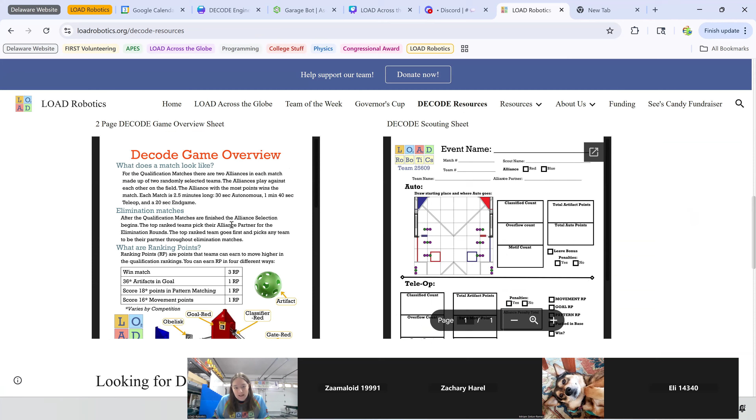Next is our Decode resources, all found at loadrobotics.org. We have our Decode game manual quiz, which I recommend for all your drivers and honestly everyone on your team to take, it's really helpful. Also our Decode Booklet for playing with your team, that's a lot of fun, just making sure everyone knows the game rules. And then we have our Decode game overview, for giving to parents and spectators, a brief overview of the game rules, and also the Decode scouting sheet. You can find all that on our website, loadrobotics.org.

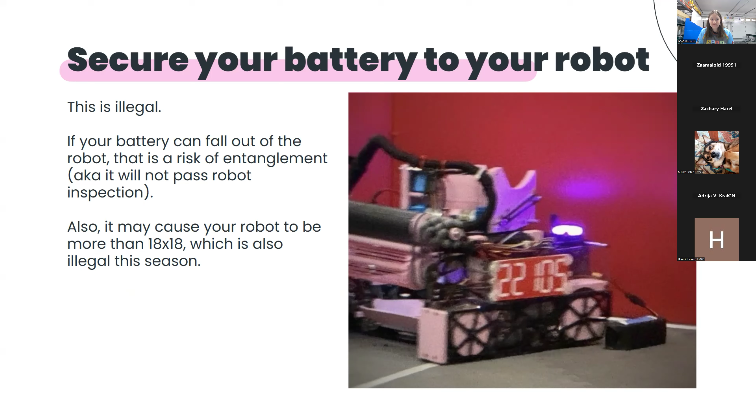So please don't put your power switch in an exposed location. But on that note, make sure it's accessible. In this example, I think they ultimately moved it to be on top of the U channel of their drivetrain, perfectly accessible, but another robot is not going to accidentally hit it.

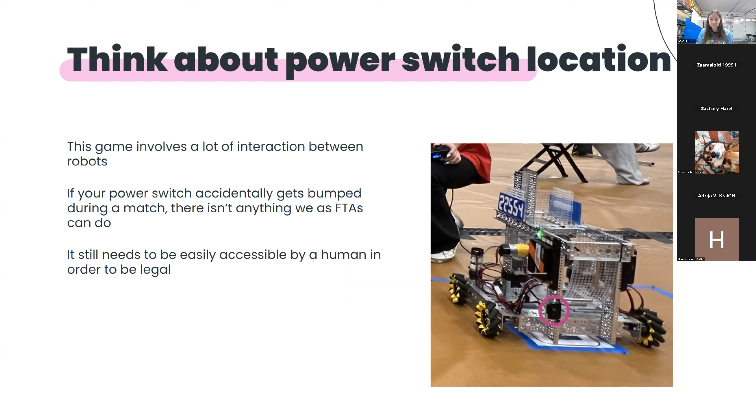Please protect and label your wiring. This picture... my brother would like everyone to know that his team did not think about their power switch location. He just texted me that. He's sitting right next to me, listening. Anyway, please protect and label your wiring. Again, it's a risk of entanglement if it's not protected.

So what protecting wiring can look like... we don't have a picture of what good wire protection looks like. Thank you, Philip. But you can also buy little labels to put on your wires so that you know what everything is plugged into.

Because when you have a giant servo extension that goes from your servo hub, all the way across your linear slides and up to a servo, when it inevitably breaks, you will want to know how to replace it and not have to go through every single wire on your robot. Make sure that it's protected. Use cable sleeves, use something, and zip tie it to your structural pieces so that other robots cannot hook into your wires and attempt to destroy your robot accidentally.

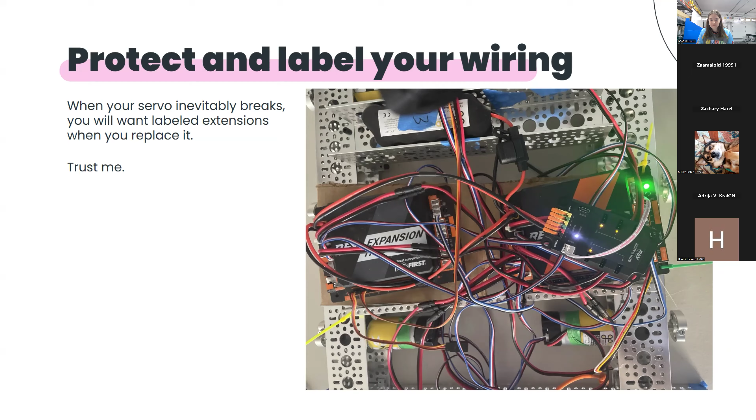The next thing is protect your driver station. You don't want to drop your driver station, so this was like a little tray that my team made last year. We velcroed our driver hub and a power bank to the tray so that they weren't going anywhere, and it was really easy to carry around. Also, you don't want to drop your driver hub and have it break, so the tray makes it easier to not drop it, and then in addition, make a case for it, or alternatively buy a case from Philip.

I strongly recommend do everything you can to protect your driver hub, and make sure that you are not going to drop it. On a similar note...

Some gamepads will also use a lot of power, so you will want an external battery pack, preferably something with a USB-C port, because the REV driver hub needs the USB-C port to charge. Going along with what Miriam said on the last slide, it's also very helpful if you get some kind of physical operator console that you can attach your driver hub, battery, and gamepads to and carry them around, so they don't fall.

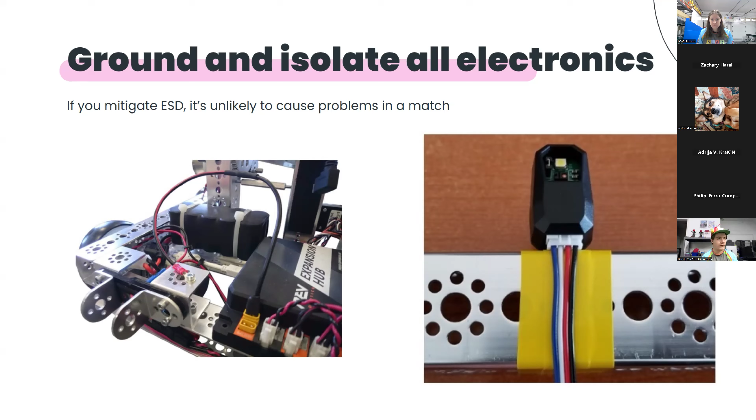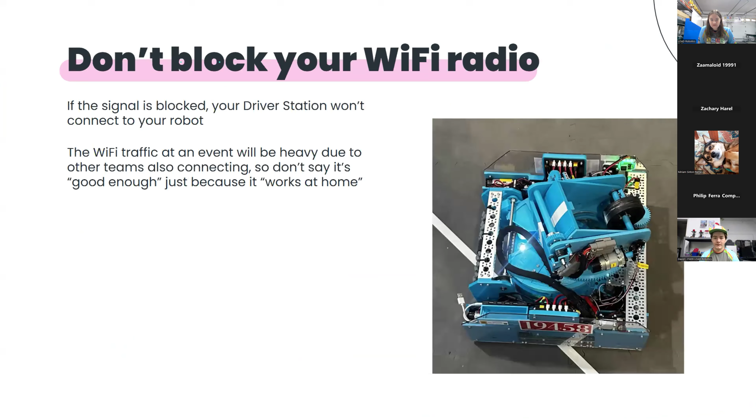So a ferrite choke is pretty much just a piece of metal inside a piece of plastic that clamps onto a wire. It's used to equalize or stabilize a signal, or just compress it. I don't really know how to describe it best, but it pretty much just resists large changes like an eddy current, and minimizes any spike in signal or something like that. It's just a piece of metal, literally.

You can just buy them, and if your gamepad doesn't have one, just clip it onto your wire. This is one of the only times in FTC you can use it proactively. Otherwise, I'd recommend not using a ferrite choke for any cables, because it will minimize signal and can cause problems wherever you put it. Don't use it until you need it there, just on the controller cables.

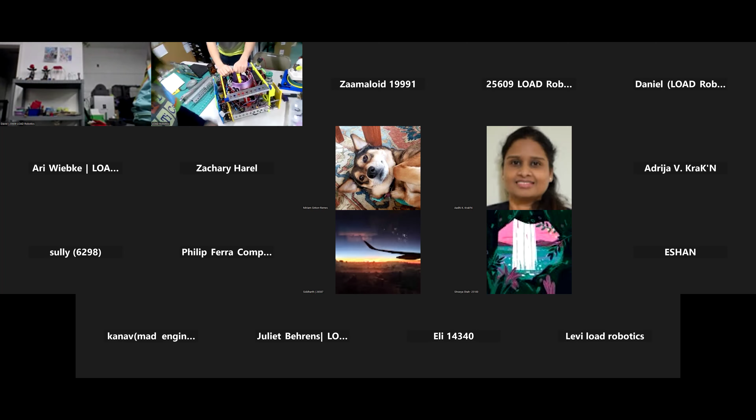Can you take the roof off? Sorry, hang on one second. Let me make myself big for a second. So this is our robot. It's a 3D printed parallel plate drivetrain. Oh, hang on, I have someone coming. So the control hub is here facing in, but it's mostly all 3D printed.

The only extrusion, there's 1, 2, 3 extrusion pieces. Would the Wi-Fi be okay, or should we figure out a different way to mount this so the Wi-Fi is facing out more?

I don't like that, because yes, it's a lot of 3D prints, which are generally fine, but then it reaches across to your expansion hub, which is not a 3D print. You also have a lot of motors and wires. That looks like a very similar setup to the picture in my presentation.

A trick you can use is when you connect your driver hub to your robot, you can actually go in and see the signal strength. There's a tech tip about how to read the signal strength, so I'd recommend reading that. If your signal strength is good, then you're fine.

If not, then you're not fine. Just know that whatever your signal strength is at home, it will be worse at an event when there are other teams who are also trying to use the wireless environment. Okay, yeah, that makes sense.

And then also my other question was about grounding. With all the plastic, I don't know. There are extrusions down here where David's going to try to show you easier, where the motors are mounted to extrusion. So I don't know if it would be best to ground it there, or you can have multiple grounding straps. Would we be better off having one grounded to our control hub and one grounded to our expansion hub, and ground multiple? I'd say a better option would be to connect all of the metal in some way.

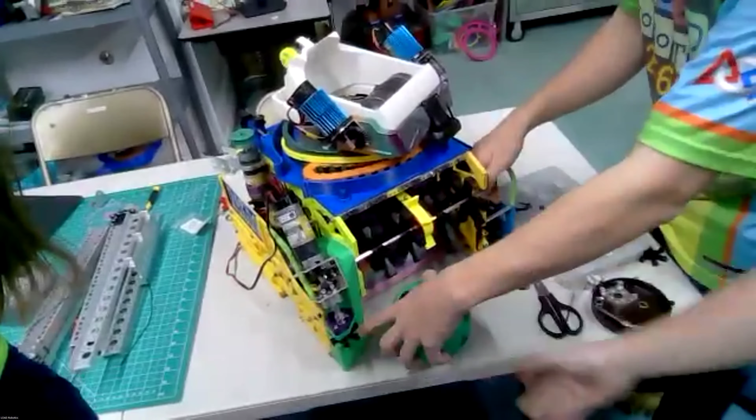So one thing I'm really excited about that I finally got working was this intake. We have this side kicker wheel on the side down here that spins with the same motor and gear as our normal intake. So we have these big boot wheels over here, and a really small boot wheel that spins at the same speed. So if there's a ball right there, we can just kick it and it'll grab it in and pull it in with the larger boot wheels.

And they're wedge shaped, so if there's a line of 3 on the ground, we'll definitely be able to get all 3 of those inside our robot as quickly as possible. I'm really proud of that because it worked really well.

The other really awesome thing is that after you take off the belt from the inside and pull out this pin on the other side, the whole intake slides off. It's got this dovetail shape right here, and a similar opposite shape on the side plate, so the whole thing can come off. Here's a better close-up view of the side kicker wheel, we built a CV joint in there. I really like how it turned out.

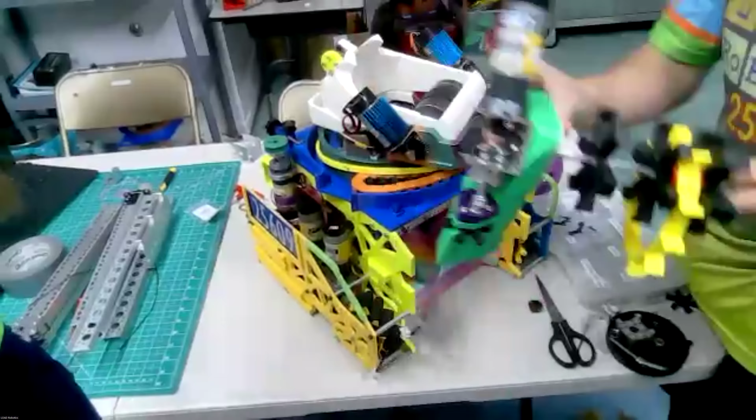I'm actually printing the mirrored version of this for the other side, so both sides will have the kicker wheels. We also use the same pins to hold on the top of our robot. They're actually out right now, but here's another one. They slide in like this, and after you take them out, the entire top of our robot comes off. Another thing we were working on was a plug, so we have this 14 pin plug and then this plug.

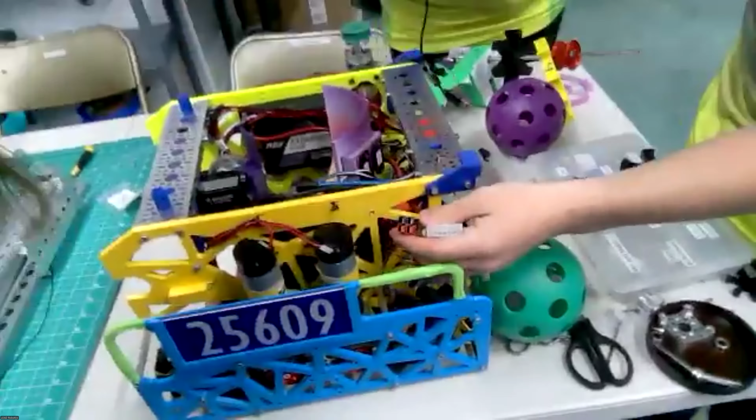This one connects to the motor wires for our dual motor flywheel. Then these ones have all the pins for the ports and the connections, the sensors, the servos, and everything that's in there. So that's really exciting that we're finally getting that on.

As you can see on the inside, we've got the new water slide, as we like to call it. It actually has sensors built into it, so we have 2 REV sensors up top and 2 more on the bottom that can tell us when there's an artifact in there. We have another kicker on the back with a servo to lift up the last ball.

Let me put the intake back on real quick. So that just slides right in. Then you put on...

Eli wants to know if there's a specific reason we went with boot wheels and the vector wheel, and why we did the boot wheels. The boot wheels, they are really squishy.

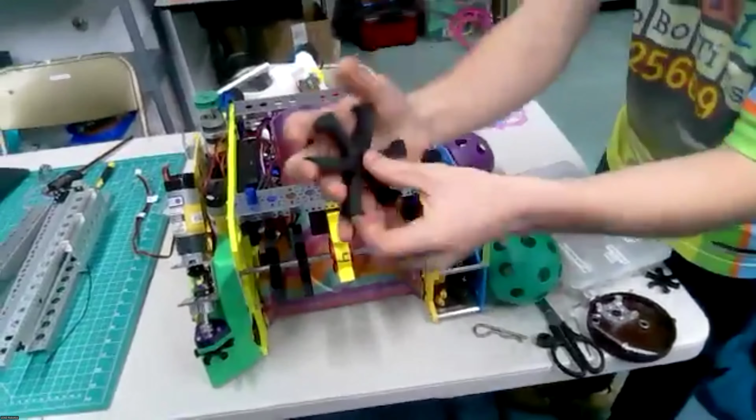Here's one, they are really squishy, I love them so much. And then they have the little feet on the ends, so they can just grab the ball and pull it right in. Even if it's spinning so fast you think it won't do anything, it really grabs the ball and pulls it. It's great, so we got these ones.

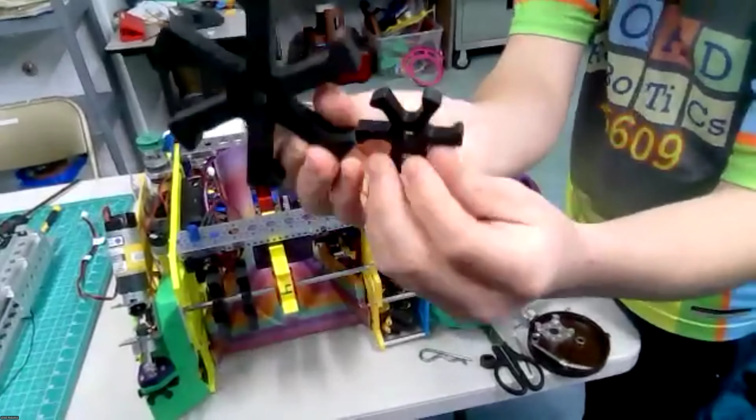And the little mini ones that are really tiny, that's what I'm using for the side intake. You can see the comparison between the big one and the little one. We also bought some medium ones, probably going to space those out along the intake. They don't really contact the ball, but it looks really cool. I think if there were 2 balls against the wall or something, it would be a lot better at grabbing those.

I'm still working on everything, so you can see there's no spacers or anything yet because I just got this together this morning. But yeah, I love boot kickers, boot kickers are my favorite.

I know one of our team members is experimenting with silicone molding for the load wheel to make it even squishier and grippier. This isn't as grippy as we would like, so he's going to experiment with that. Those would replace some of the wheels on here, maybe on the outside.

Oh yeah, and then our turret that goes on. We have our cable chain in here—you can't see it very well, it's kind of covered up, but that's in here. So our turret can spin back and forth however it wants, all the way around, everything like that.

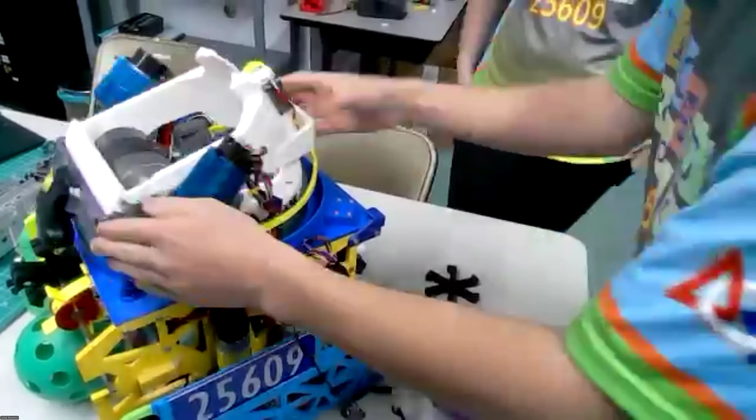And all our wires are tucked away in here, so they all go in right here and come out down here to where all of our plugs are, so they can plug into the bottom of the robot. Then we have an adjustable hood up here—I like to show that off.

And then our 3.5 pound flywheel weight that we're still testing—very loud, we love it. And the banana, of course, which is the little blocker that can block the artifacts from going through in here, right there.

So that's our robot at this point in the season. We're very proud of it so far, I think it's going to be great, it's going to be a lot of fun.

Yeah, I saw someone asked if they wanted to show—it's a blue banana, yes. I didn't even think about that, that's funny. You're gonna paint the boot wheels?

We hadn't really thought about it. I'm not sure—do you think they would paint? I'm not sure, I think they would lose some of their... yeah, like the paint would just crack off them, I think, because they can bend so much. That would be cool, but I think the black color is like a nice contrast to all the range of colors that you have.

Alright, I saw someone asking if they could share their CAD—go ahead, we'd love to see it. Yes, rainbow or fun colored silicone. Ooh.

It's not that pretty because this is our current bot right now.

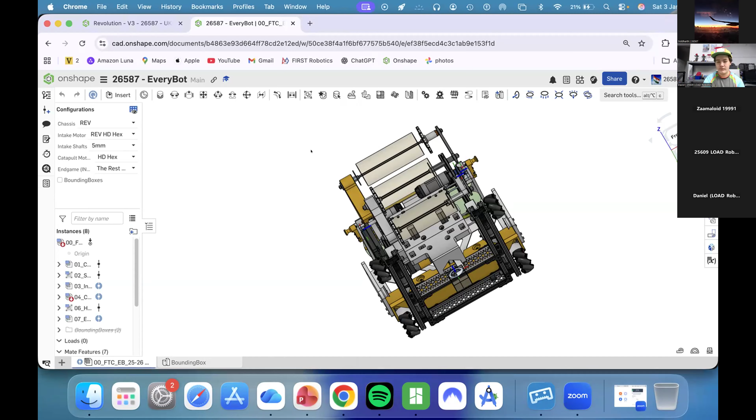Okay, so has anyone heard of FRC Team 118? Like Robonauts, they're extremely famous. I think they won the Milstein division this year.

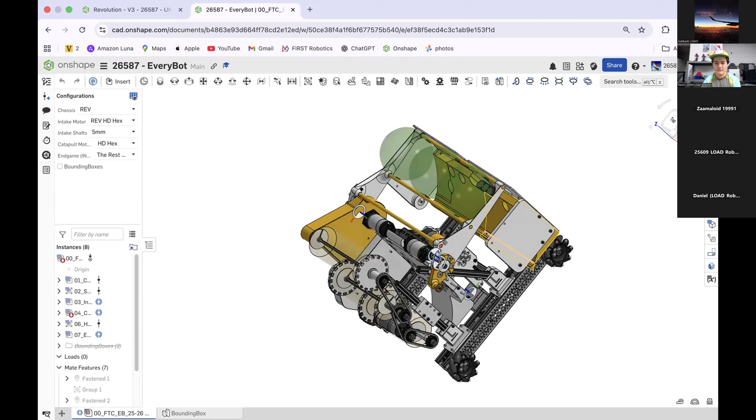So we got a crap ton of new members this year, and we wanted them to learn how to build a robot. So right now we're just showing the everybot. It has an intake and a catapult for its outtake. No side panels right now. We were planning on adding side panels, but then we just decided to go straight to our V3.

So this is right now what we have, but sometime in January this year we're going to have a massive change. It's going to look completely different.

Now we're going to go to our main CAD. There's nothing much to see because I'm still assembling everything, but we are going with the turret this year. We're going with the turret and a retractable hood, but we're not going with the spindexer. This year we think that volume matters more than sorting, and if you score as many balls as possible, you can actually get more points than people that spindex.

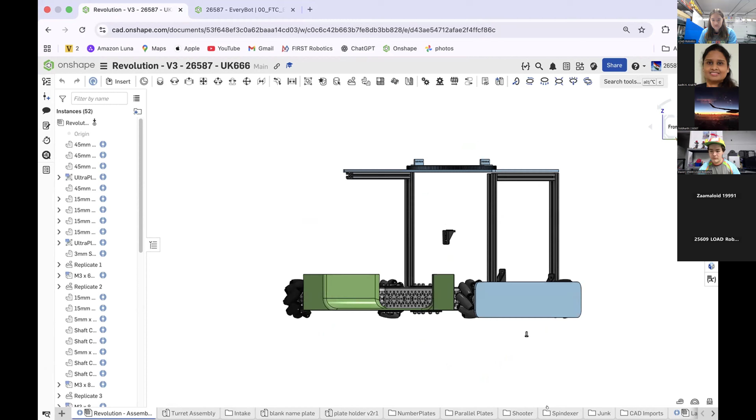So I'm going to show you guys. I'll first show you our turret because it's in a separate document. Where is it? So this is our turret, and basically it's still in progress, but we use I believe it's an AH301 bearing. I think I'm wrong.

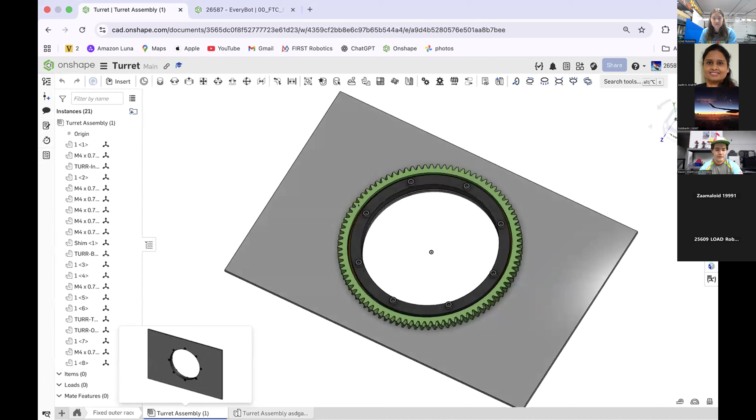Basically what we can do is spin pretty fast. So when I attach the motor and everything, it should be around 1150 RPM. And then we would attach our retractable hood and shooter on it.

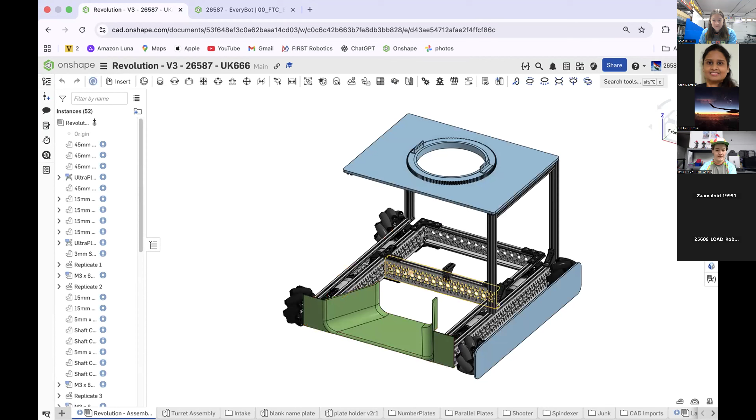And for our main robot, we are going mainly with Rev this year due to us having a lot of stock of Rev products. So we have the Rev Robotics Mecanum Drive. We actually found that pretty useful because it's much smaller. It has smaller mecanum wheels, which is actually perfect for our build because we are planning a lift incoming.

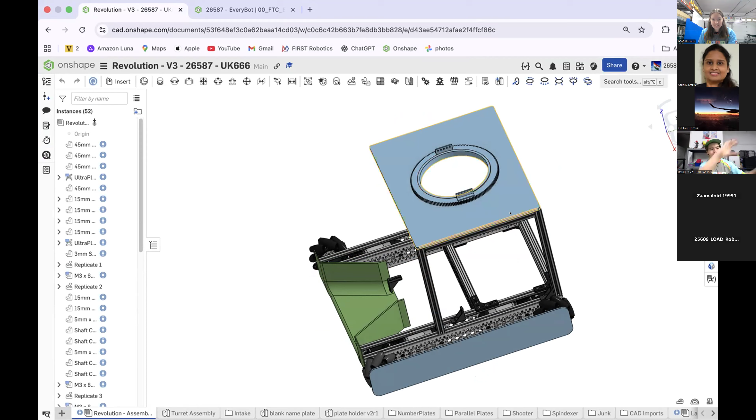Trust, guys, it's going to be a very, very cool lift. Nothing that anyone else has ever seen before. We haven't actually cut it yet, but there are a lot of drawings. We're not going to use MISUMIs or belt drives to lift off because we found those to be extremely bulky.

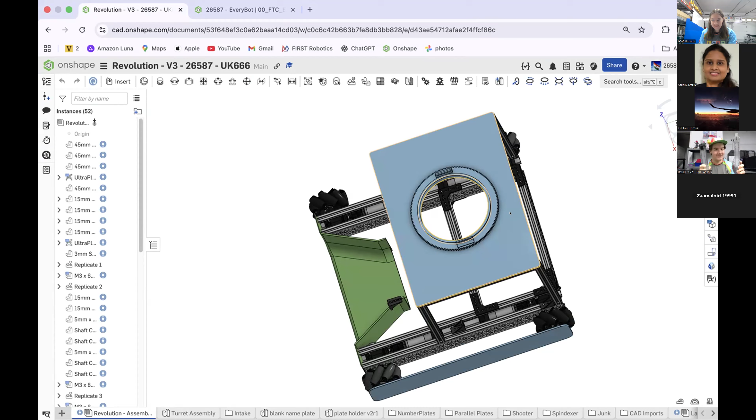So our first thought was actually to use the offset robotics cascading slides, but we found out that they take up a lot of space, and since our robot is going to have a massive form factor, so it's going to be pretty big, we found out a way to lift using something called a scissor lift.

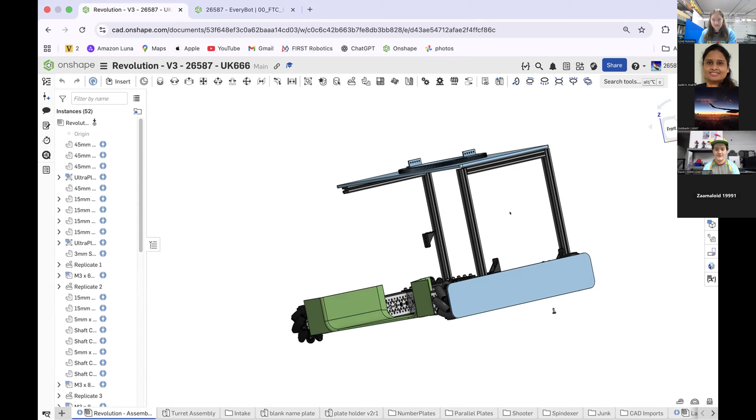If you guys know, like in FLL, you have these scissor lift things, and you can move things pretty far forward and pretty far backward with them. So our strategy is just to motorize one of those scissor lifts and machine them out of aluminium. Then when we want to lift, we will just lift off the scissor lift.

Now, I maybe think this will work, but I don't. It's sort of a debating topic right now, because if we do the scissor lift and we lift off and our robot falls, it's completely cooked, since the initial drawings have things situated in places where if it falls, there's no more robot. So we're currently doing an active redesign on that as well.

Thanks for seeing the CAD. Wait, I'll show you the shooter. Shooter. Wait, no, where did I leave it? There's so many tabs. Oh yeah, so here we basically—wait, no, wrong one.

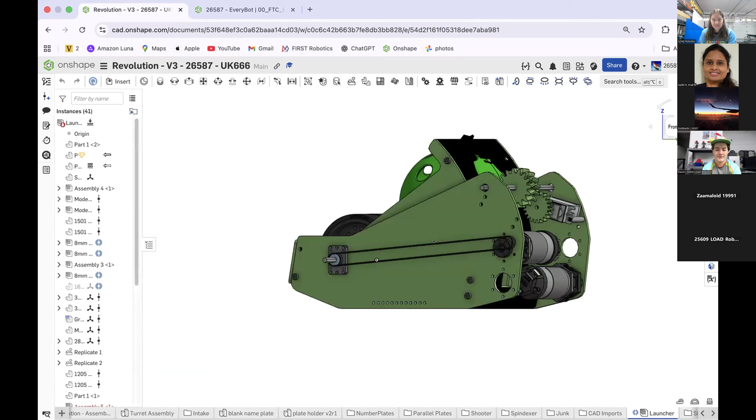So we basically combined the use of Rev motors. We have dual Rev motors, and we're using a belt on it as well. And then we use goBILDA Rhino. So it's a mix of goBILDA and Rev, because we don't actually want to buy as much goBILDA this year—we want to be very efficient with our finances. And currently our finances are in shambles, so we need to email some more companies.

Thanks for seeing the CAD. Does anyone have any suggestions on how to improve it? I think I'm going to ask Eli if he's still here because I've seen a lot of his CAD. Does anyone have any suggestions for it?

Yeah, that was awesome. Thank you for sharing your CAD. I really like your shooter. It looks really good.

The shooter was actually inspired by something I saw on the FTC forums. Some guy posted a shooter, so I was looking at it and took the idea of using belts and dual motors, and we threw that in with us as inspiration, because we were looking at different shooters for this season.

We found out that with a retractable hood there are many ways to do it. You can pivot the hood off your shooter axle where you're spinning the flywheel, but we found some teams had the flywheel speed wear out the holes used to pivot the shooter, making the retractable hood less efficient than if it were powered another way, which is what we did. We sandwiched the bottom part of the shooter and added the retractable part on top, so everything fits in a small form factor.

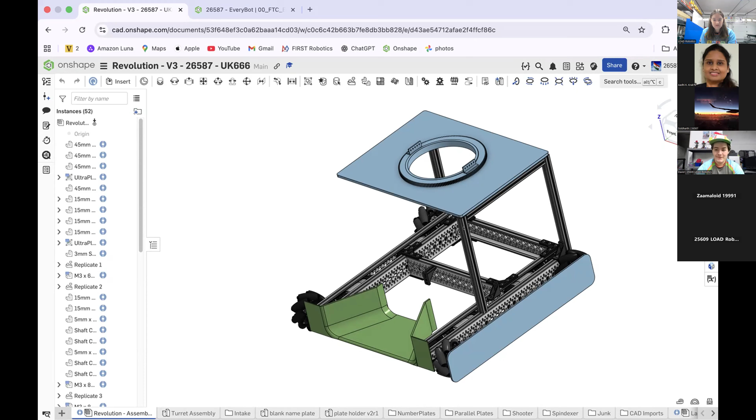We're basically just going to base everything off our Rev drivetrain. I wanted to go parallel plate this year but couldn't be bothered to spend hours CADing, so we're adding parallel plates to the Rev drivetrain and calling it a parallel plate drivetrain since it has parallel plates. Also, I haven't added this to the CAD yet, but we're going with belts, so it'll be belt driven instead of using the Rev Robotics UltraPlanetary gearbox with a 90 degree setup.

Cool, yeah, can't wait to see it done. Yeah, I promise it'll come because I was on vacation until yesterday. I landed yesterday, so I'm going to lock in next week, and I hope the CAD review comes out next week.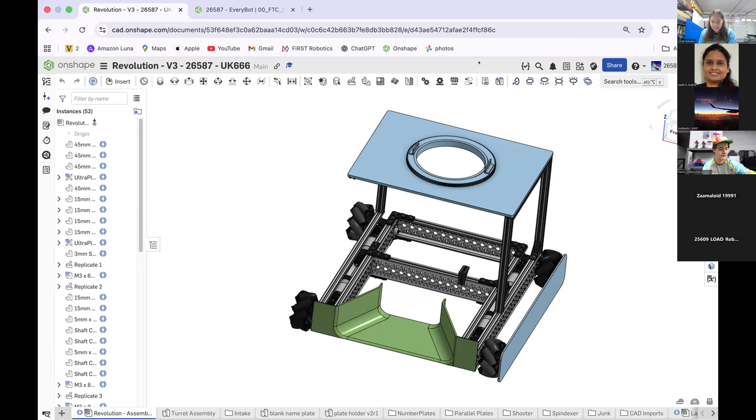I saw a question from Josephine: what are you planning to do for your transfer? For our transfer, we looked at different options and watched a lot of Behind the Bots, don't blame me, it's free content, I'm not complaining. One of the transfers that caught our eye was Techno Z, world record holders with an absolutely insane performance last year.

We currently have a rubber band intake on our V2. We were thinking of intaking artifacts from outside using vector wheels and gecko wheels, and then for the inside transfer we'd go with rubber bands, a mixed transfer system if you know what I mean. We were also thinking of a linkage system where the ball goes straight and a linkage brings it up, but we've seen teams have issues with that stuttering.

Can I suggest kickers? My opinion is they aren't as efficient because you have to manually kick every single ball up. I was thinking we directly shoot the ball into the shooter, using servos to give secondary power in case our motor can't keep up, since our entire platform is currently just Rev, and Rev products can go kaboom at the most important times, so we're trying to figure out how to best utilize what we have.

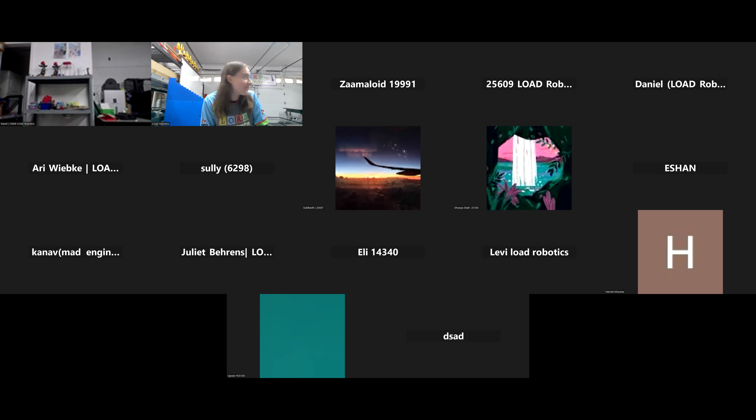So, oh no, yeah, we took all the wheels off because we needed them to build a little basic chassis. And then, yeah, it's kind of really sad, all the motors are gone now. So is it just a raw frame? Like, is it just a frame? Time to show you guys - oh, Marvin, at this point it's basically a pair of Viper slides on a frame.

Damn, yeah. So it's just a pair of Viper slides. No, Marvin, man.

That pains me to see, because I actually remember the fun robotics video, there's a short of you guys FTC at the World Championship, and I'm like, damn, that robot is so cool because it's all multicolored. I think that was the first ever robot I've seen that has different types of colors, because most teams just adhere to one or two colors. Yeah, Eli's glazing so hard.

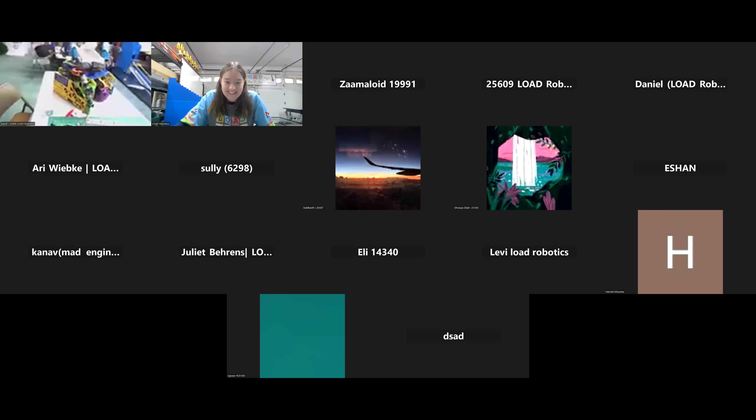FTC at World Champs and load with L3 and Robo Kings. Oh yeah, Robo Kings was in there as well. Damn. Yeah, we tried to make our robot as colorful as possible.

This year it's continuing, but with a 3D printed parallel plate drivetrain, so we're nearly all 3D printed, which means we can go crazy with colors. It's like a Prusa XL, right? Yeah, we just put the enclosure on a few weeks ago, and we were amazed at how well it prints now.

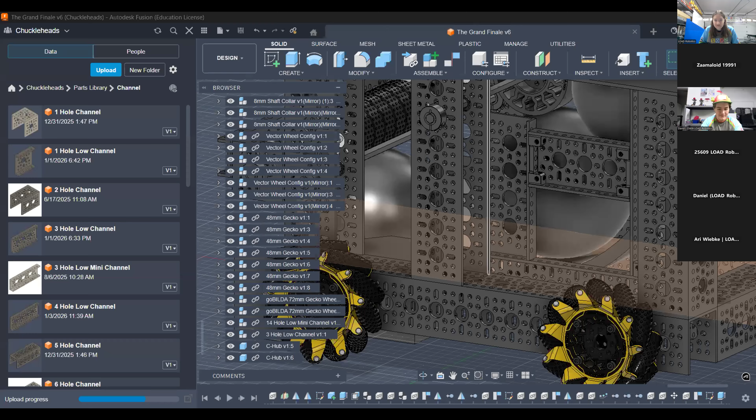All right, time to figure out how to share Fusion. This is not the right one. Sorry, I've got a very slow laptop here. Good, taking its sweet time. And now it's just crashing. Okay, there we go.

Yippee, Hydra, maybe, if it loads. Yeah, you guys have a crazy robot. I like the whole retracting thing and then the 3 launchers. It's crazy. Yeah, it'd be great if it didn't fall apart, but...

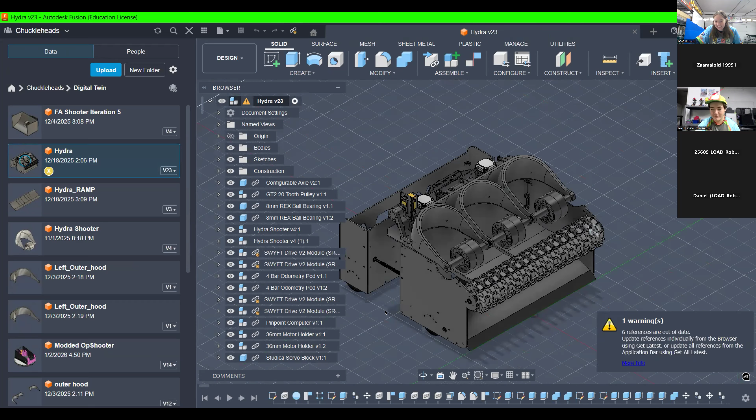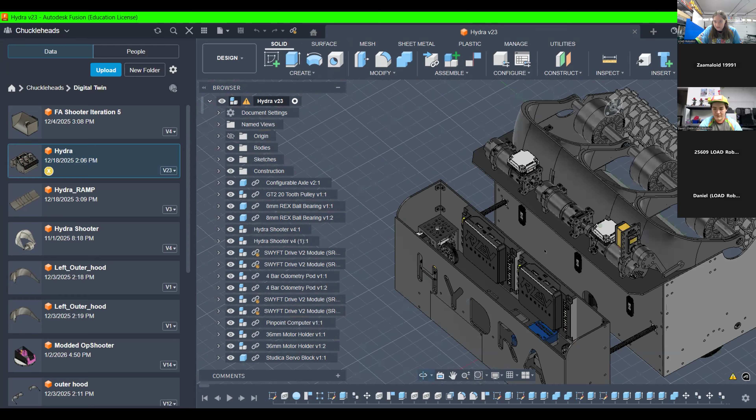Missing an RGB up here, and the whole wire portion. Yeah, that's pretty simple, but yeah, it's goofy.

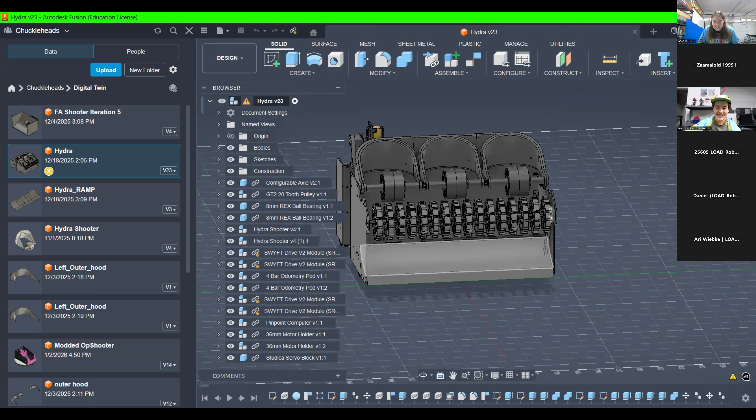There's a lot of SWYFT wheels in the front there. Oh yeah, we don't have the flywheels in the CAD right here, but we bought out SWYFT for their flywheels. We bought the entire rest of their stock. So yeah, that's fun. We got the motors back here.

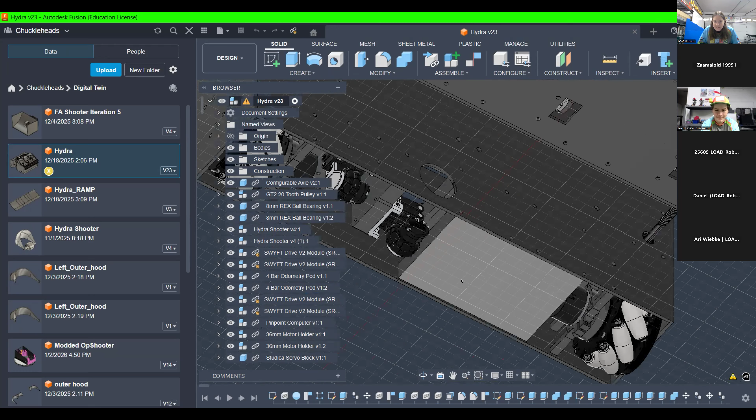Odometry battery back here. One thing I really do like is the cable routing. It all goes through one long strand back here to the hubs, so all of the wires for everything goes through.

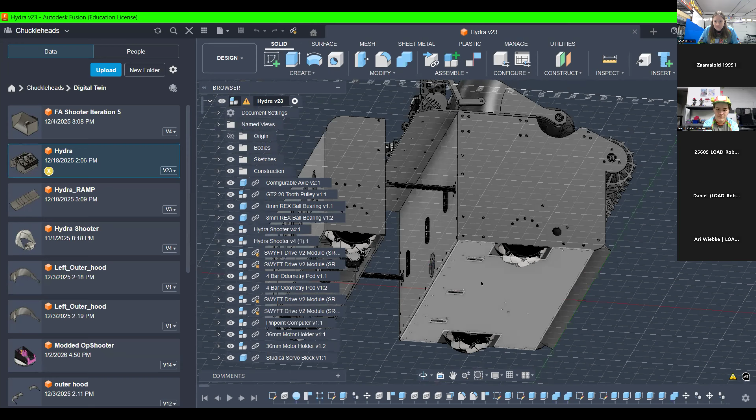I was about to just point physically. Yeah, through this hole right here, and into a matching one right here, where it joins with all of the cables from down here, like the back wheels, the odometry pods, and all connects through this hole right here and up to the hubs.

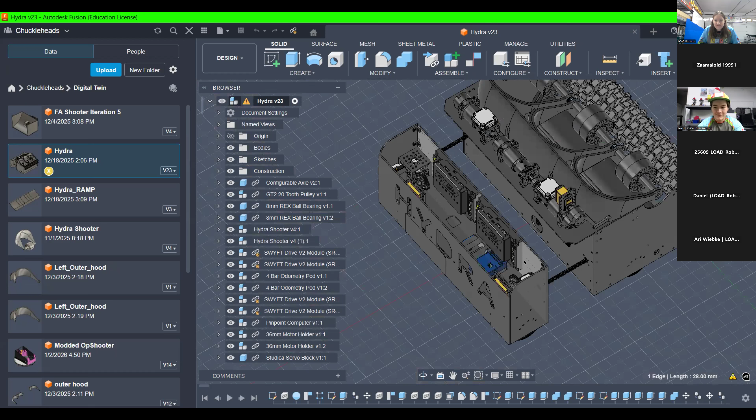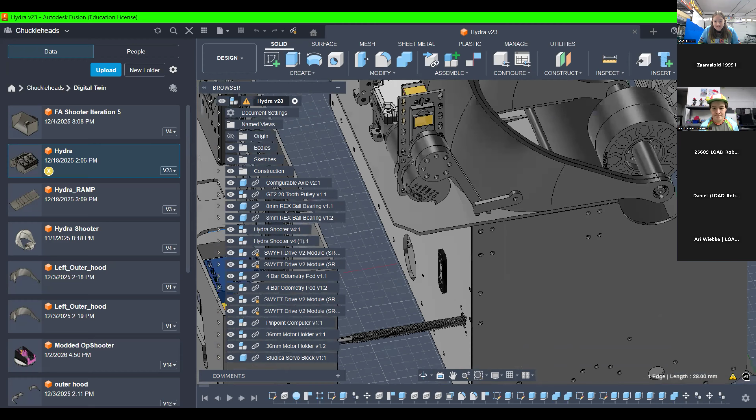Best cable management of any robot we've had by far, but you have to have good cable management because the whole thing shrinks. If not, you'd get a bunch of squished wires. Only issues we've had with that in terms of cables were two of the kicker servo cables got caught somewhere in here and unplugged themselves, but that's about the worst of it.

Do you fire all three artifacts at once? Yeah, most of the time. We can index, but in reality, it's just faster to shoot them all at once. There's a reason we're switching to a spam game.

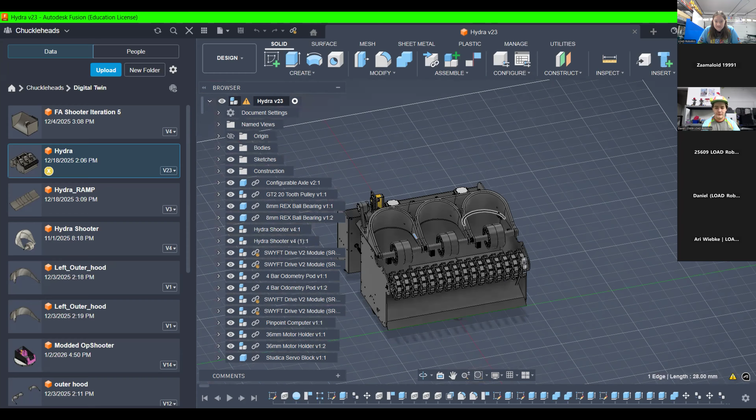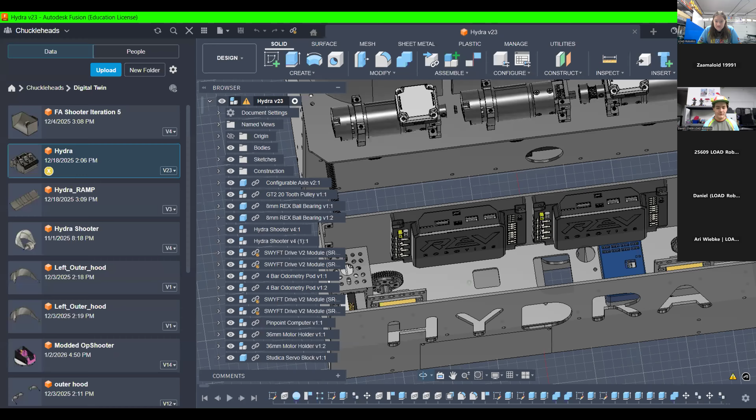What servos or motors are you using to expand and contract the robot? It's only two servos. We've got goBILDAs on the CAD, but we've actually switched to using SWYFT Balance servos. There's a lot of SWYFT on this bot. So just two servos. Somehow they don't explode, but we're getting them ready to phase this one out.

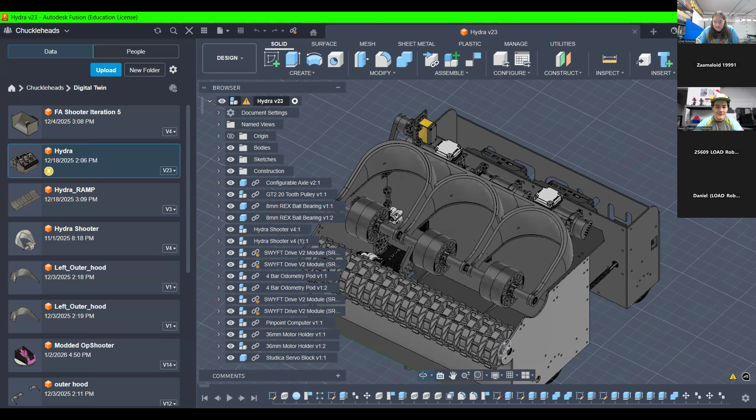But yep, that's our bot. Cool, thank you for sharing. Awesome, yep. Eli says average Fusion experience. That is so true.